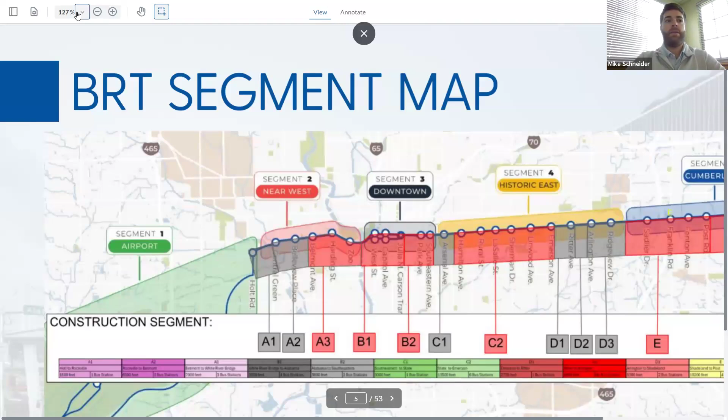On the next slide, we can see a BRT segment map. As part of our design, this project was broken up into 5 design segments, which you can see at the top of the image. From there, we broke it up into 12 construction sub-segments. I've highlighted 6 of those I'd like to talk about in red, from A3, which is at IndyGo's West Campus, and we're going to work our way east. B1 and B2 includes downtown, and segment F is the far east end of the corridor in the Cumberland area.

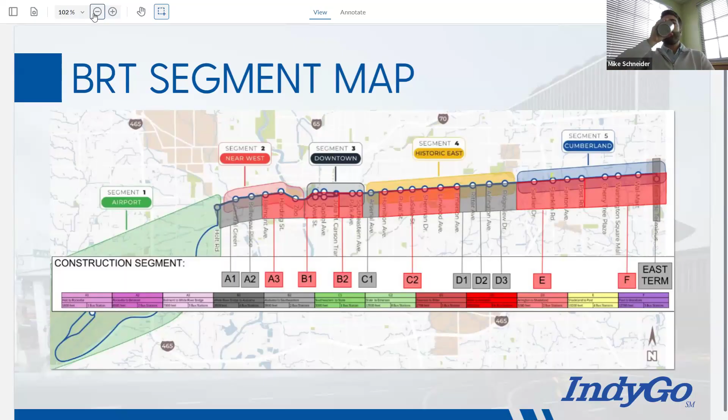Okay, let's jump in on the next slide. So a large majority of our work so far has included storm sewer installation, a snippet in front of 1501. All of this work was completed as part of probably our most impactful closure to date, at Washington and Harding Street, which was mostly completed on time. Here's how this works: crews install concrete storm sewer that is then backfilled and ready for pavement, as you can see on the right side of the screen.

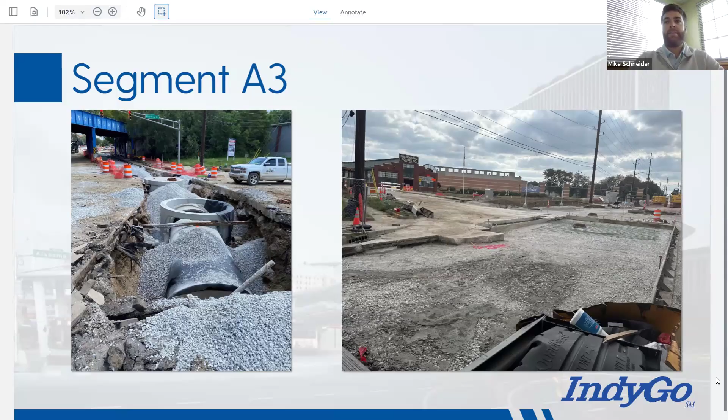And you can see that pavement on the next slide. This is the same area where you just saw the subgrade treatment, and the crews on the right image are doing the final touches as part of that closure, with a nice image of 1501 in the background. We still have crews working in the area, nothing impactful, mostly sidewalk work, some curb, some signal work. Those utility crews have then moved from here, making their way west for our next lane restriction, which will be a 6-month westbound restriction from Harding to Belmont. I expect that to start within the next 2 months, depending on how utility work goes.

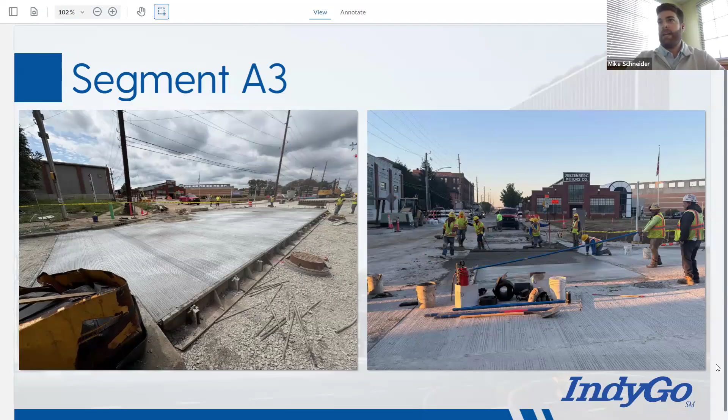On the next slide, we can see another snippet of more concrete pavement underneath the CSX bridge, just east of 1501. Okay, moving along to segment B1.

If you're a civil engineer or history nerd like myself, one of the cooler aspects of this project is that it runs through old US 40. As expected, we've uncovered some of the old railroad that ran through Indianapolis, as you can see on the left-hand side, as well as some of the railroad ties you can make out under the stone there. This is in front of the State House. On the right-hand side, you can see this area in its current-day state. The State House is our most complete station to date, and the only one that has the steel canopy installed.

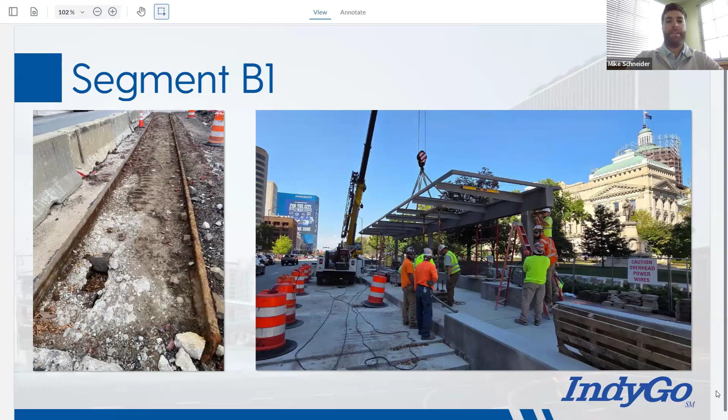All of this work is being completed as part of phase 1, which I'd consider the brunt work, the larger construction. Phase 2, which will include the final touches and smaller work to complete the station, will occur in winter 2027. This will be a recurring theme: as you drive through the corridor, you may see a lot that look incomplete. This is all per plan as phase 1. State House should be our first phase 2 station, so don't panic if you see a lot of incomplete stations. It's all per plan. Moving along to segment B2.

One of the more unique aspects and larger risks of the project is installing some pretty substantial storm sewer into the Pogue's Run tunnel that runs underneath Indianapolis. On the left-hand side, you can see the construction management team and myself doing a field trip and exploration just to ensure that this storm sewer was ready to be installed per plan. We didn't run into too many issues, but wanted to get ahead of any risks ahead of time. Being such a substantial installation, this could have been a huge delay for the project, but luckily we didn't find anything that would delay our progress.

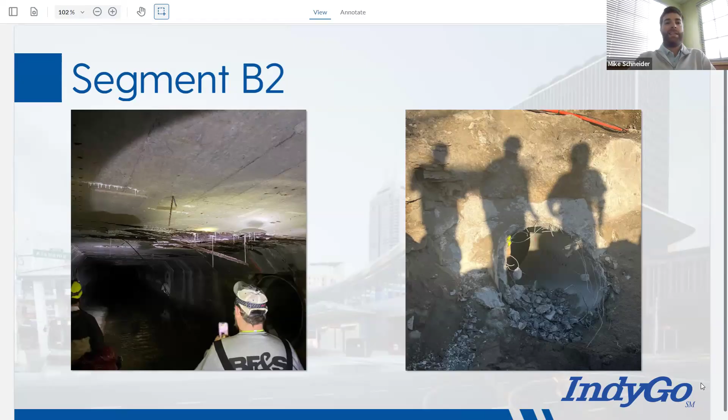On the right-hand side would be our first excavation. What you can see there is an existing pipe. This was then removed and would be the location of the first of two pipes we installed, which you can see in the next slide. That area was then replaced with a 42-inch black corrugated plastic pipe.

The second is currently being cut. You can see the gentleman on the bottom right. I was hoping the hole would be there already so I could share that with you. I'll make sure to do that next time. Crews are currently out there.

Again, one of the riskier aspects of the project, just because of the proximity of the two pipes, this man is cutting a hole for a pretty substantial 66-inch concrete pipe, which in the world of storm sewer is pretty huge, and also because of the location of the two pipes right next to each other. We needed to make sure that the tunnel itself was structurally sound enough to support large holes, two separate holes right next to each other. So luckily, no issues as of yet, and I'm not expecting any delays at Pogue's Run.

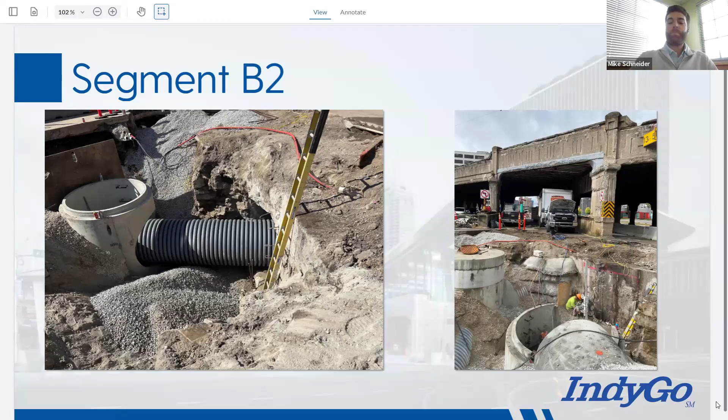Moving on to the next slide, this is just a view from the same area we were just looking at, looking east. In the background, you can see I-65. All of this work is being completed as part of our 4-month lane restriction at College and Washington. Progressing nicely, I'm not expecting any delays here. We would like to open up that area as soon as possible. Hopefully a little early, but no promises made yet.

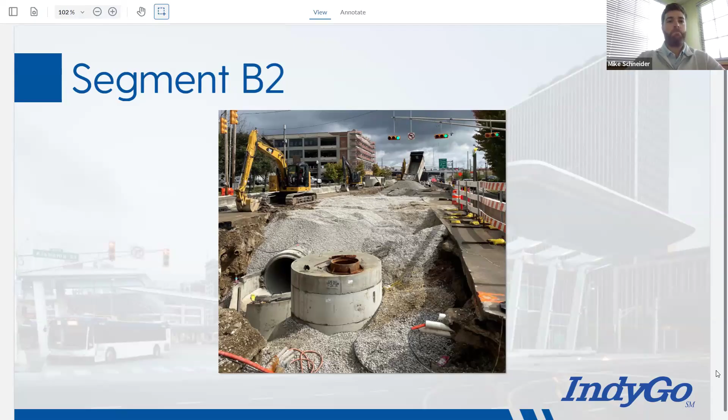Moving along to segment C2, we are entering the near east side part of the project. I wanted to include this as more of a unique aspect of the project. We have two underground stormwater detention units. This one is located at Willard Park. The other is located at Indianola Park, just west of 1501. On the left-hand side, you can see just how far deep we had to go underneath the shoring and tiebacks.

This is one of, if not the largest mass excavations as part of the project. The crew actually had to do this in halves, beginning on the southern half, moving all of the dirt to the northern half. So if you drove the corridor, at one point you may have seen a mountain of dirt next to Washington Street. Crews installed the underground stormwater detention unit on the south side and then flipped. The purpose of this is to hold stormwater and control the outflow into where it's supposed to go.

On the right-hand side, we can see its current day state. Most of the construction is complete. However, we do have some cleanup work and a little bit of minor construction to complete this area.

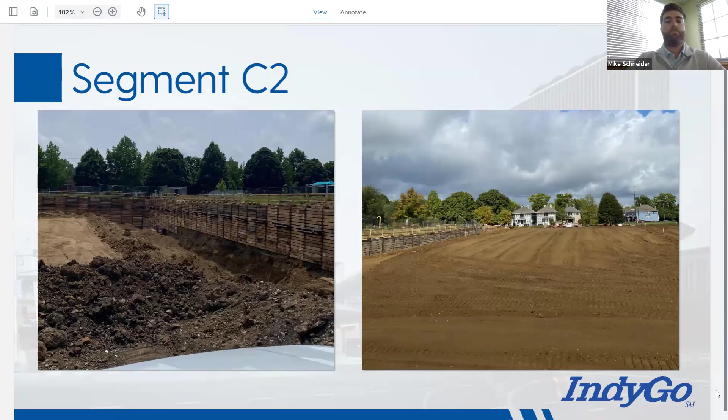Moving along to segment E, we are entering the far east side. So this is an area on the far east side. We didn't have a ton of major stormwater work yet, but crews have been working diligently on some paving, as well as concrete curb, concrete sidewalk, and whatnot. So I just wanted to include some of the asphalt paving that we have been completing as well.

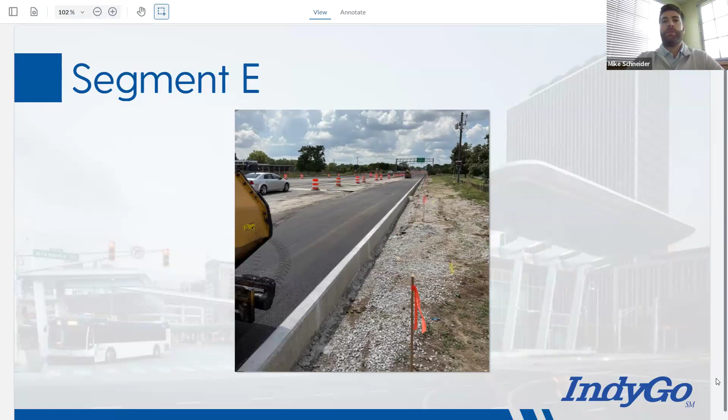Moving along to segment F on the next slide, on the far east side, we are just west of Mithofer. This location we refer to as Cherry Tree Plaza, and is called out on our segment map that way as well. So Cherry Tree Plaza is our second most complete station to date.

You can see the foundation poured on the right. Originally, our second station was supposed to be at the convention center, which was held up a little bit due to permits. That has been resolved. Crews have begun working there. However, the Package A contractor, which is our roadway contractor, was able to release 3 of the stations on the far east side. So we're not expecting any delays. That's just where our contractor was able to mobilize to. They will drop back and then begin construction on our other downtown station at the convention center shortly.

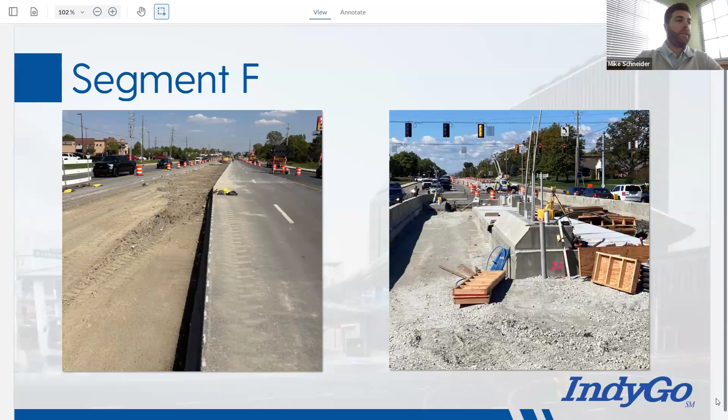The next slide is a wonderful schedule. It's still early in the project, so we are looking right on time. Hopefully it remains that way, but I will provide the latest and greatest as we move along. Again, it's pretty early, but as of now, no serious delays. We have a few years to go though.

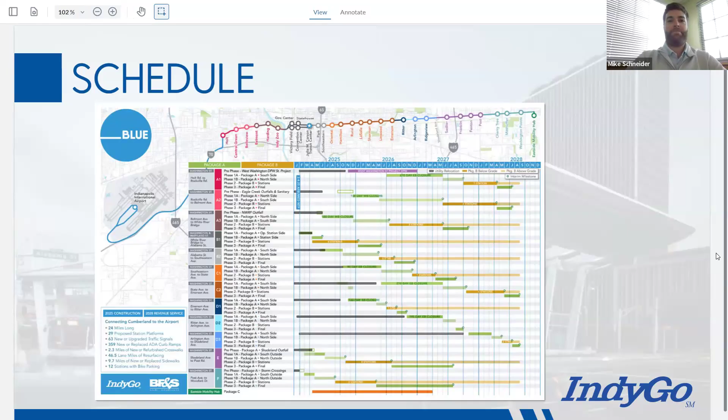No, the important thing to know is it's on time, and we appreciate that. Just a couple of questions. I think it was in the B1 section in the downtown area. Can you remind me what happens as we encounter those railroad ties? This was all part of the plan. Irvington has a ton as well. They're just cut out, removed, and disposed of. I know we've been coordinating with Irvington because they do want to keep some of them. We were involved, I haven't heard much traffic lately. This came up a couple months ago. It's not part of the contract, so the contractor has to be on board as well. But this is not a surprise to us. We knew this going into construction.

Okay, and then are we having to route people around the segment near 1501? We had a full closure at Washington and Harding. The next substantial lane closure will be from Harding to Belmont, which will be a 6-month closure of the westbound lanes. That work is not completed yet. Utility crews are diligently working, heading west from 1501 to try to get us in there so we can complete our work.

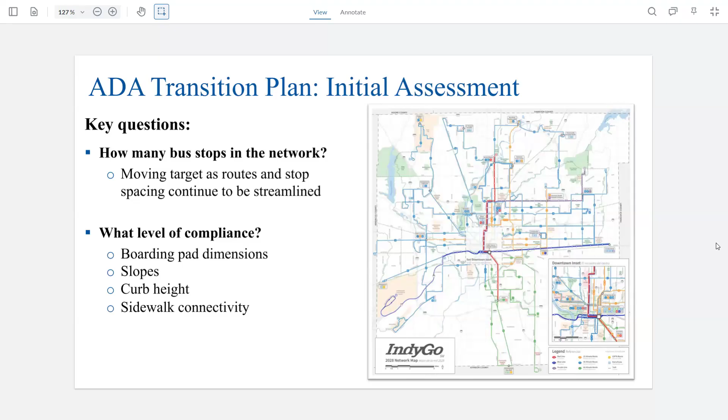The entire inventory was assessed for how they scored from 0 to 5, and only 5s are considered compliant. We have a table showing how we rate from 0 to 5, with examples here. Level 0 meets none of the criteria—no boarding pad, no sidewalk, bad slopes. We're trying to take all these 0s, 1s, 2s, 3s, and 4s to the fully compliant level that checks all the boxes.

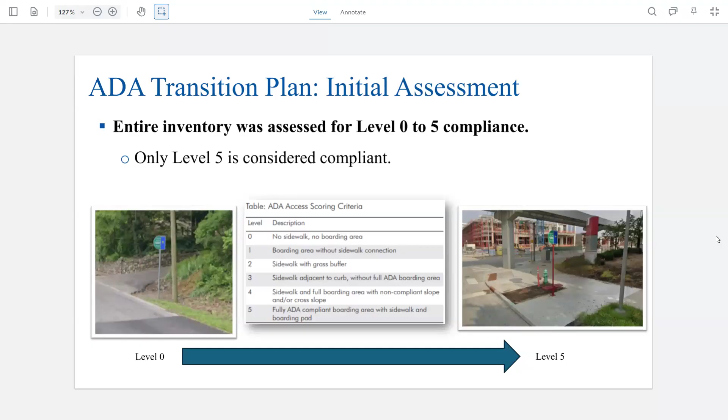As we developed the original plan, the initial inventory back in January 2020 had 3,385 stops. As the plan was still being drafted, some stop rebalancing was done, and after our first round of improvements we landed at 2,908 stops. Level of compliance in January 2020 was only 16.3%. By April 2021 it was 21.7%, and that's where we fell at the adoption of the original plan. Keep that number in mind because I'll circle back and let you know at the end where we stand now.

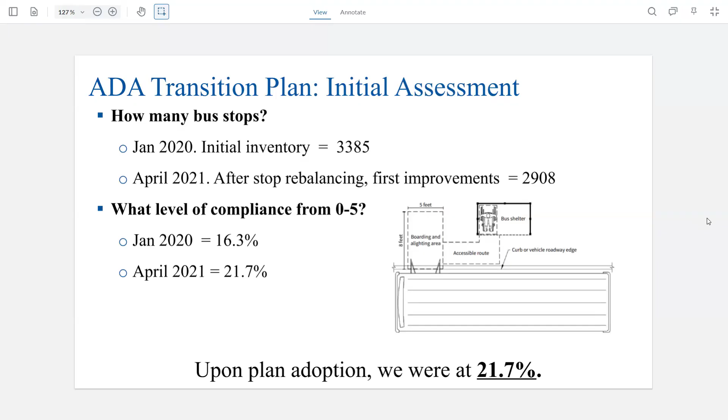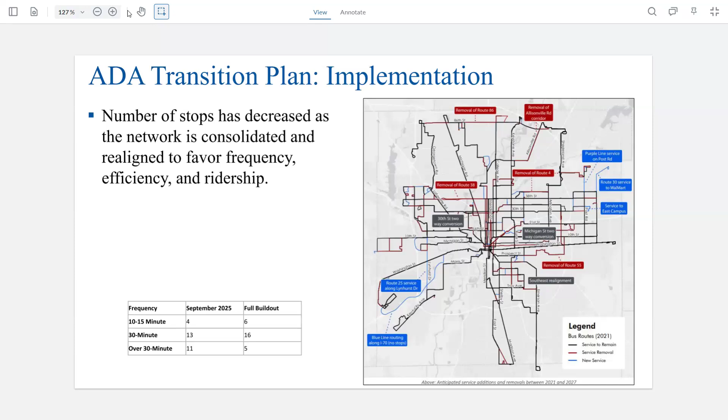For implementation, the number of stops has decreased as the network is consolidated and realigned to favor frequency, efficiency, and ridership. This map shows a number of routes throughout the city that are planned to be realigned between 2021 and 2027. That's an ongoing effort, and the number of stops continues to drop as we roll these out.

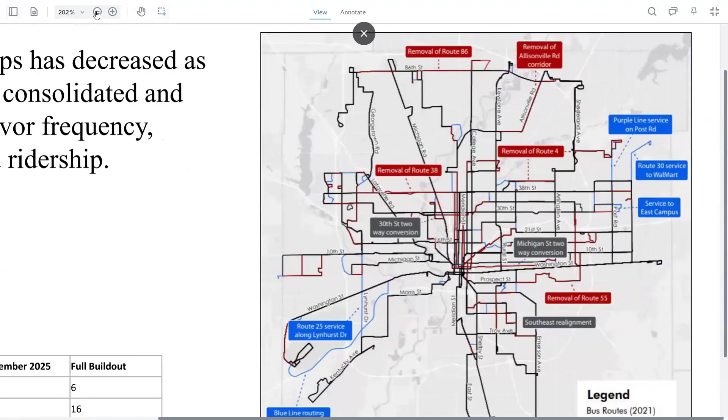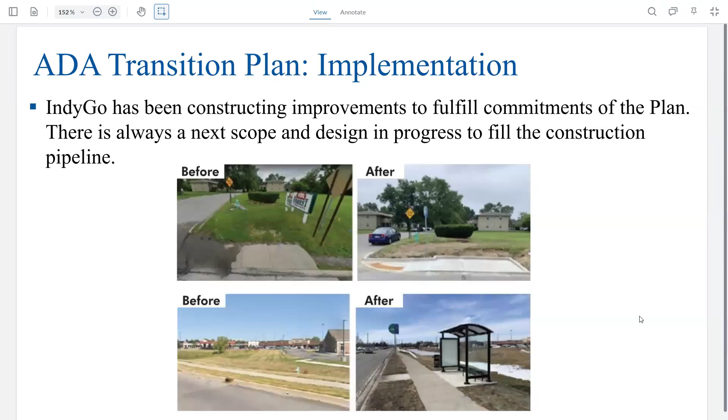Question: roughly how large are these batches? The one package I'm working on now has 55 stops in it, so it's kind of a range—it's varied. There's a range because the price can vary; we try to target $1 million or so in our bids. If there are traffic signals, it throws the number down because that adds to the cost quite a bit.

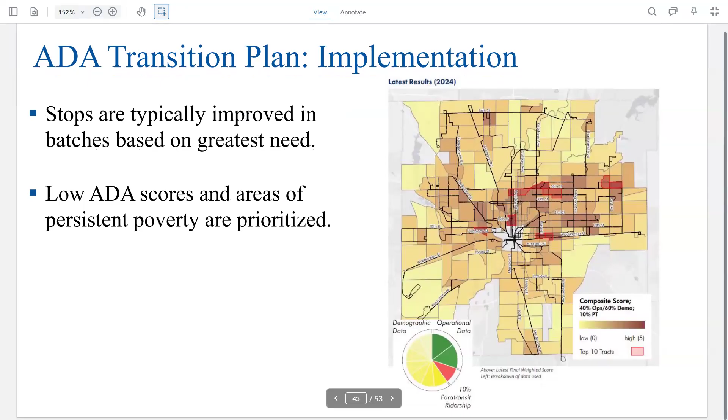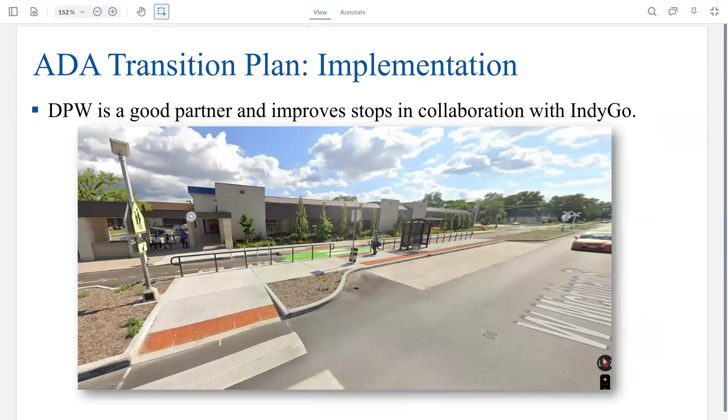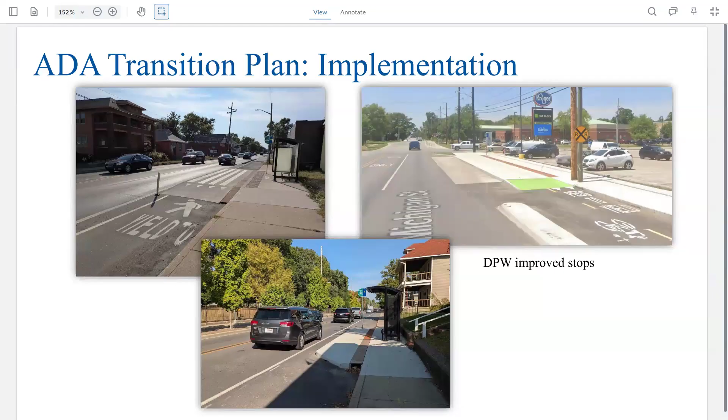BRT projects are also a means of bus stop improvements. The purple line was a big jump for us, rolling that out almost a year ago now with 18 new level boarding pads, which are also considered ADA compliant. And we also rolled in 7 local bus stops within the project.

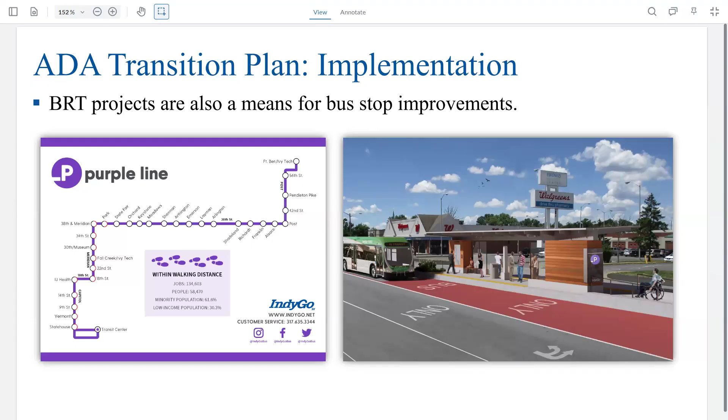So staff, the service planning team, maintains a local stops database to track the inventory and all these improvements, always continually updating that. There was a lot of effort to reflect all the work done in 2024, which was a really big year—133 stops improved in that year.

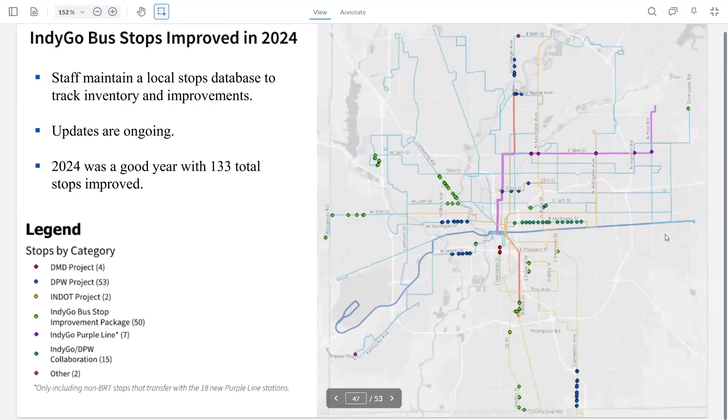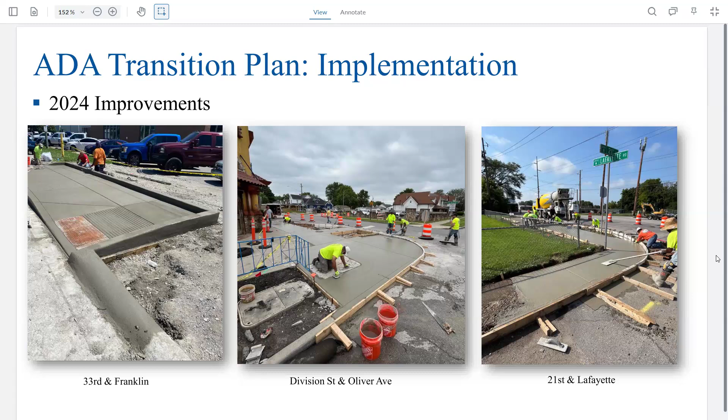Big thank you to the IndyGo Foundation. Grant funding speeds the rate at which we can implement these improvements. Since 2021, we brought in a lot of grant funding, including an $81 million CIG grant for the Purple Line.

We've had 2 different FTA areas of persistent poverty grants that totaled $1.3 million specifically for design, plus DPW Indianapolis Neighborhood Infrastructure Partnership grants. We've gotten one every year over the past 4 years, $500,000 each year, and then here in 2025 it was $350,000.

And then a handful of others with the support of IndyGo Foundation from IU Health, Fifth Third Bank, MIBOR, Honda, 16 Tech, and others.